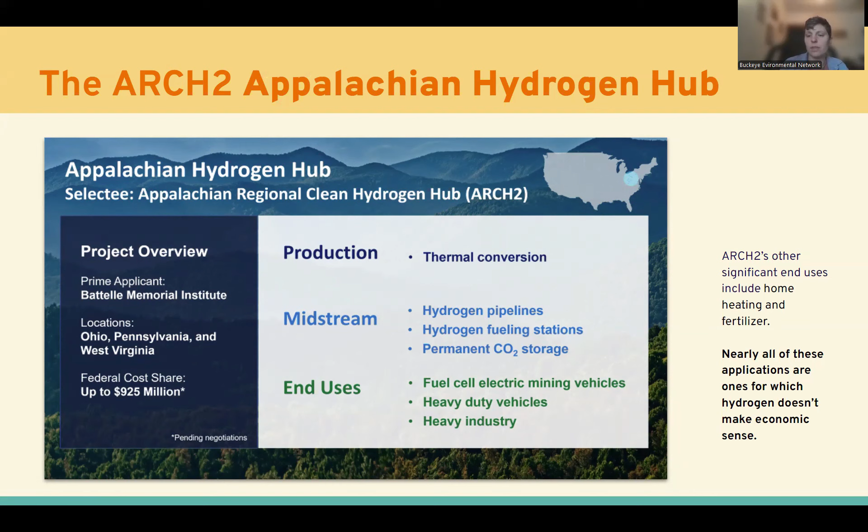There are 6 other hubs around the country. The Appalachian hub is just one of 7. And the federal government Department of Energy wants to dole out about $1 billion for each hub. Other significant end uses include home heating and fertilizer, and nearly all of these applications are ones for which hydrogen doesn't make economic sense.

Here's another map. The Enbridge Gas Ohio, formerly Dominion Energy Ohio, is here in the North Canton area for electrolytic hydrogen production, storage, and pipelines for use in regional transit, confirmed for the SARTA, Stark Area Regional Transit Authority. They would be working with that facility there.

The Independence Hydrogen Facility is proposed for Ashtabula, Ohio, and that would be hydrogen production from industrial off-gas from an existing chemical facility for heavy-duty equipment. Plug Power is confirmed for Etna and North Randall, and they would be storing the hydrogen, refueling stations, fuel cells, and backup power.

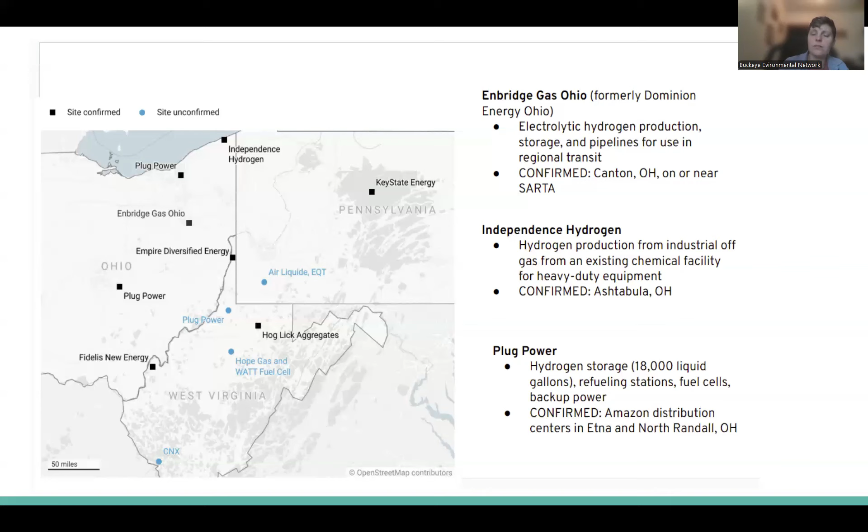These maps are constantly changing. There could be more facilities hop online at various places throughout the tri-state area. And these facilities are not the only places this would affect, because you have the fracking that would be needed. So fossil fuel extraction to the methane reforming or autothermal reforming down to carbon capture and injection - that process is blue hydrogen. Gray hydrogen is that process without carbon capture and injection, and it currently makes up 95% of US production.

Gray and blue hydrogen, both made from climate warming methane, have no place in our region. Green hydrogen is the only truly clean hydrogen there is, and it's not yet market ready. It's truly clean because it uses renewable energy, and that should only be used for heavy duty, long distance transportation and things like cement, steel, and other industrial applications. Only niche uses - not for passenger vehicles, utility scale power generation, and heating homes and buildings.

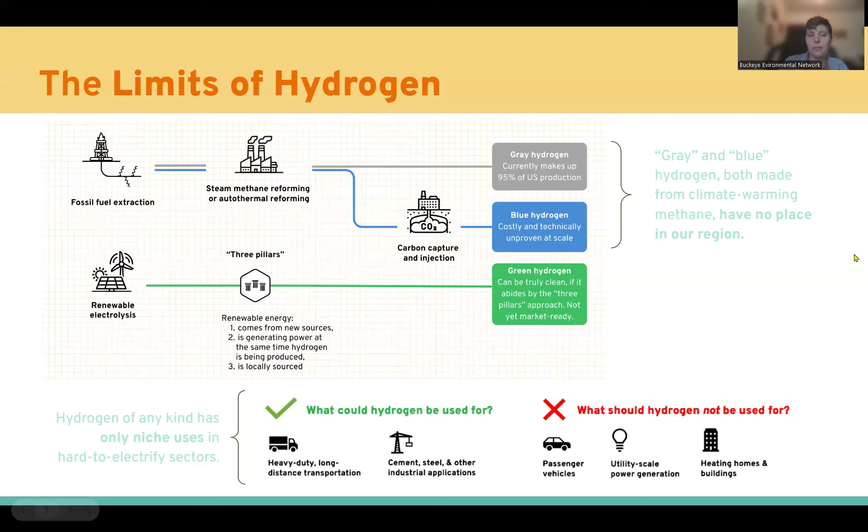Here's another slide on blue hydrogen. Again, it would use fracking. The gas pipelines can leak and release methane into the environment, and then you have the CO2 sequestered underground. Just a little graphic to understand a little bit more about that.

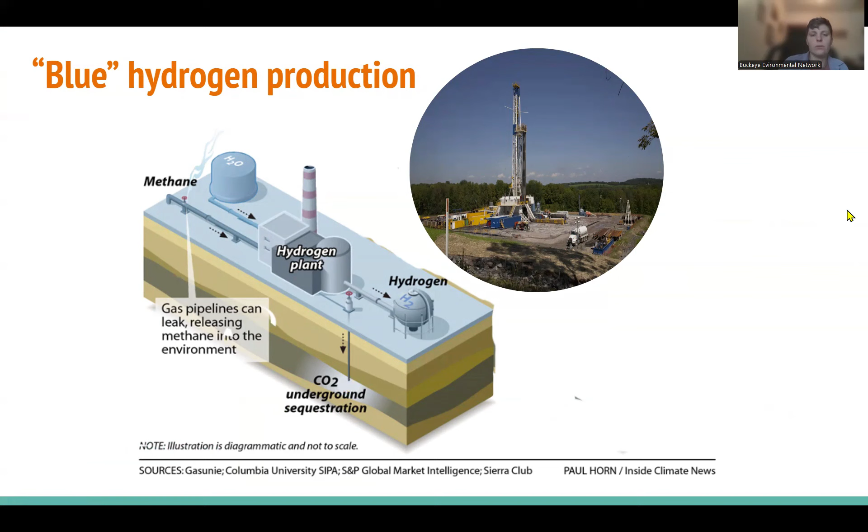The industry is attempting to create a demand for something we don't even need. They're looking for ways to stay afloat so they can keep extracting gas and oil. Clean energy is cheaper, more efficient, and more reliable than hydrogen and carbon capture and sequestration. Here's a little video if you want to check that out, AppalachiaHydrogenFacts.org.

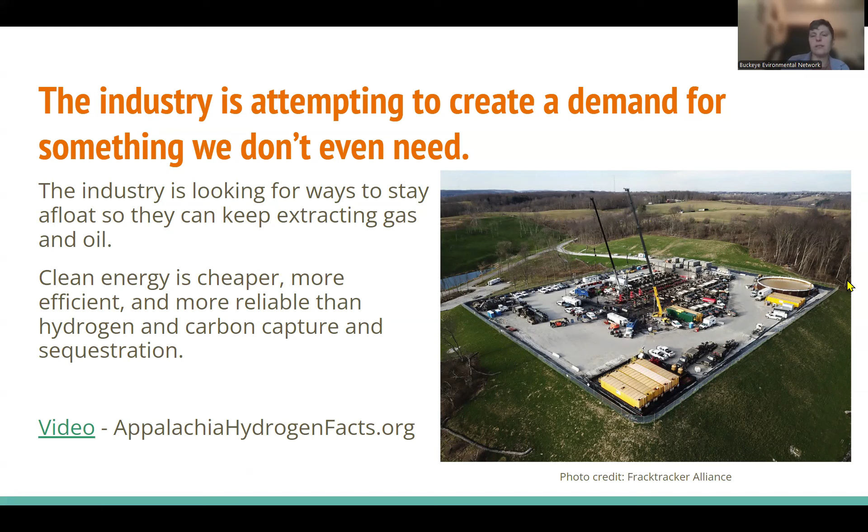Here's a photo from Fracktracker Alliance of a frack pad. More fracking would be required. Health impacts from oil and gas extraction are plentiful. That would mean more radioactive fracking waste and related infrastructure.

I wanted to plug this book here, Petroleum 238. Justin Nobel wrote it. He's an environmental journalist and a great writer, and he writes about this radioactive fracking waste issue nationwide. Here's a photo of Austin Master Services in Martins Ferry, Ohio, where the company piled in tons and tons of waste, well over permitted levels, and they left. There was an Ohio Attorney General lawsuit last year, and that lawsuit's ongoing, but ultimately the state of Ohio is going to have to pay for this mess.

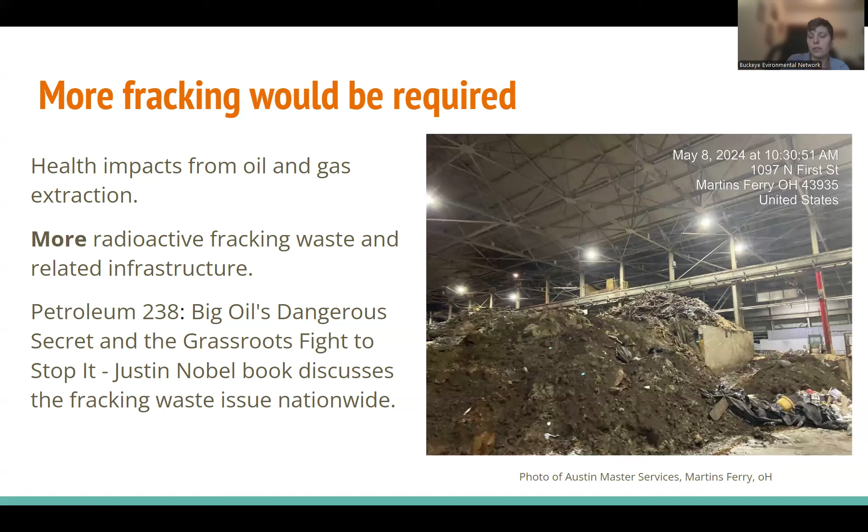$6 million is what it's going to cost to clean this up. The point is we don't need more of this waste stream. It's a real issue for the industry, and we don't need more of it. We need to focus on other alternative energies instead of perpetuating this.

The whole project depends on taxpayer dollars and government incentives. $925 million from the Inflation Reduction Act is what the government put towards this. There's two different tax credits here, for carbon capture and hydrogen, which we'll talk about later. But taxpayer dollars shouldn't be going towards these types of projects. We should be going towards truly transitioning projects, not these.

They use misleading terminologies, and there's a lack of transparency. The hub is not clean. It would use fracked gas, which is far from clean. They're pushing plans through without any transparency on site activities, locations, and plans. They're holding events without true experts, and technical questions have gone unanswered. Groups wanting info have to sign a non-disclosure agreement as well.

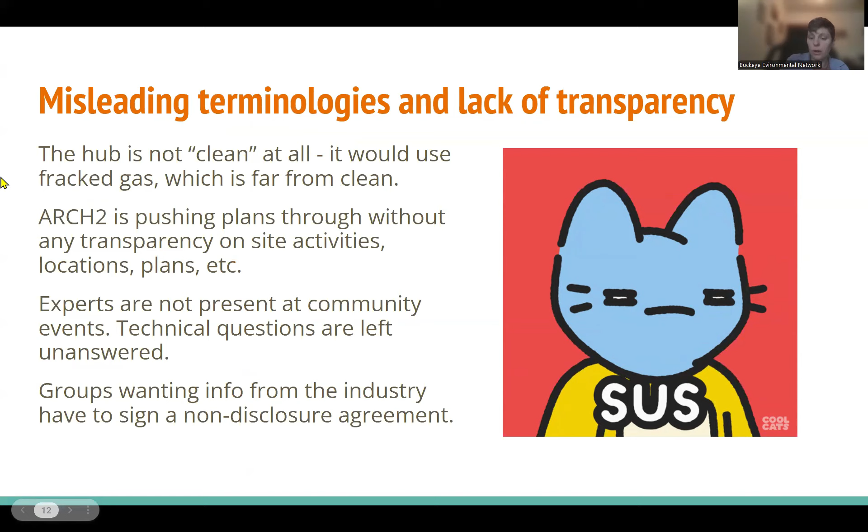Using hydrogen to power homes and fuel appliances is inefficient and wasteful. It actually takes more energy to create and use hydrogen than it does to just use natural gas alone. We should be using the energy we have to transition off of fossil fuels. Truly green hydrogen should only be used in niche industries.

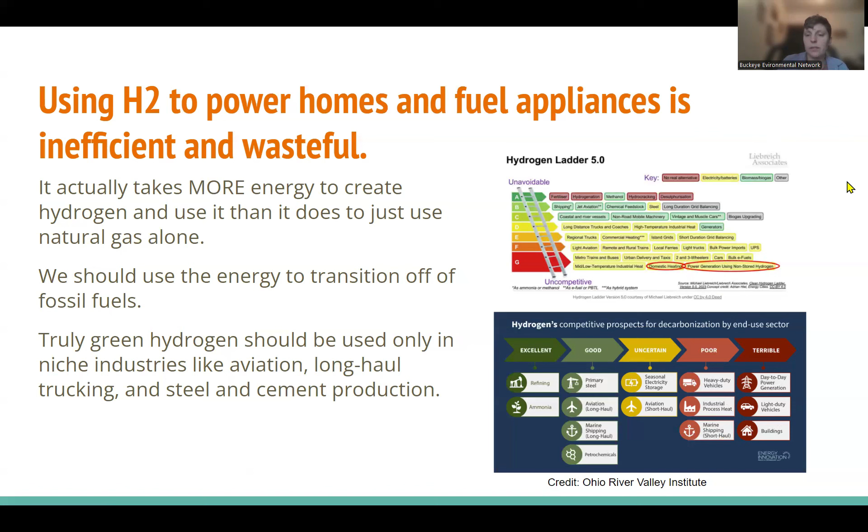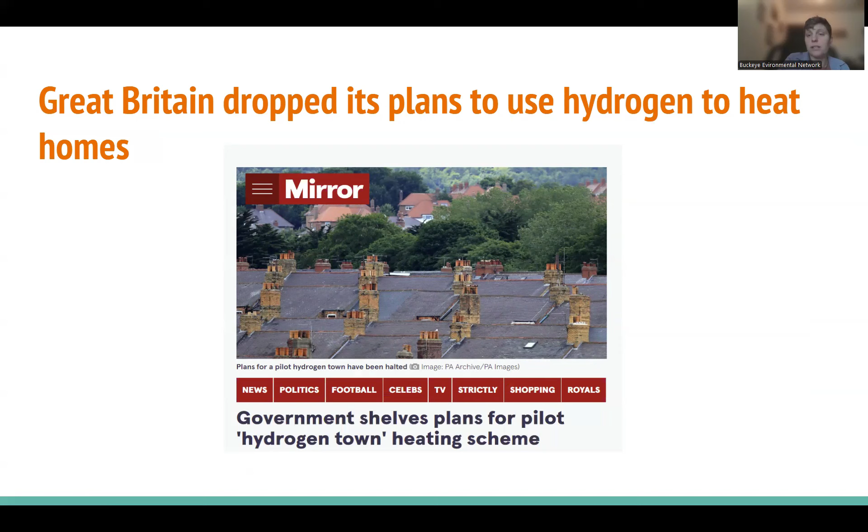Great Britain dropped its plans to use hydrogen to heat homes. This is from an article where the government basically shelved its pilot project. They realized it was just not a good idea.

Fuel cell buses are also a bad idea. They're a false climate solution for which there are already better and less expensive clean energy alternatives, including battery electric and hybrid buses. The capital costs are more than twice that of battery electric buses. Hydrogen fuel cell cost per mile is double that of diesel, and they require expensive new infrastructure to deliver and use hydrogen. Battery electric buses are more efficient, and fuel cell buses will increase the demand for natural gas and fracking.

Here's a picture of a hydrogen bus that exploded in Korea. This happened recently.

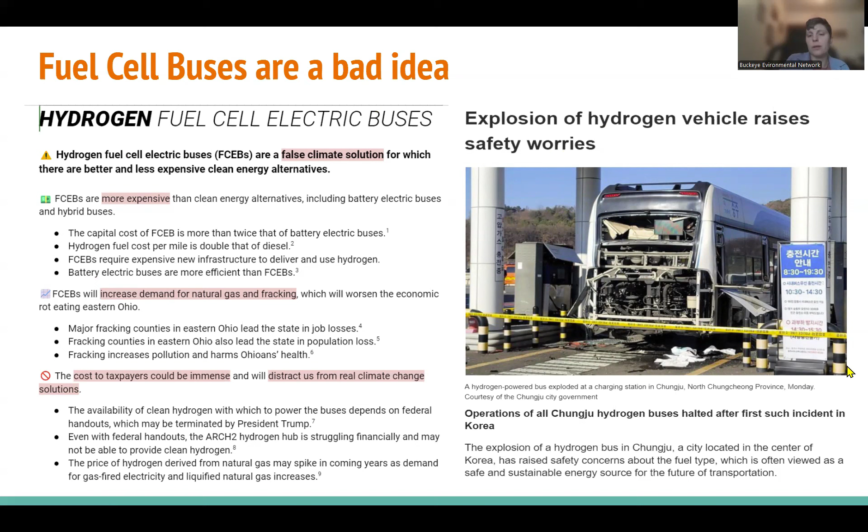Here's a slide on the dangers of carbon capture and storage. It's a greenwashing tool that poses a host of problems. It's unproven at commercial scale. It's really expensive. It enables fossil fuels, may increase emissions, and endangers those who live nearby.

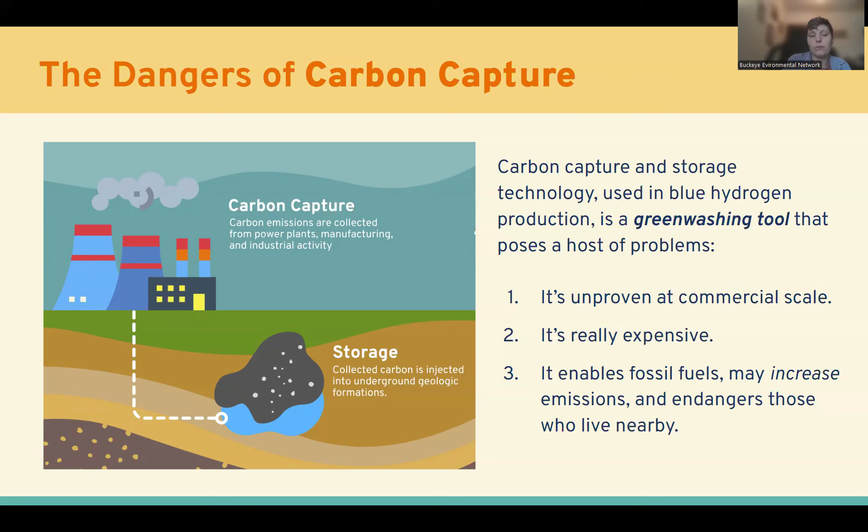Hydrogen and carbon capture and sequestration are not done at mass scale yet. There are only 839 projects globally, and only 51 are operational. Most of the rest are just planned, and they rarely, if ever, capture 90% of the carbon emissions. It's experimental, unproven, and dangerous.

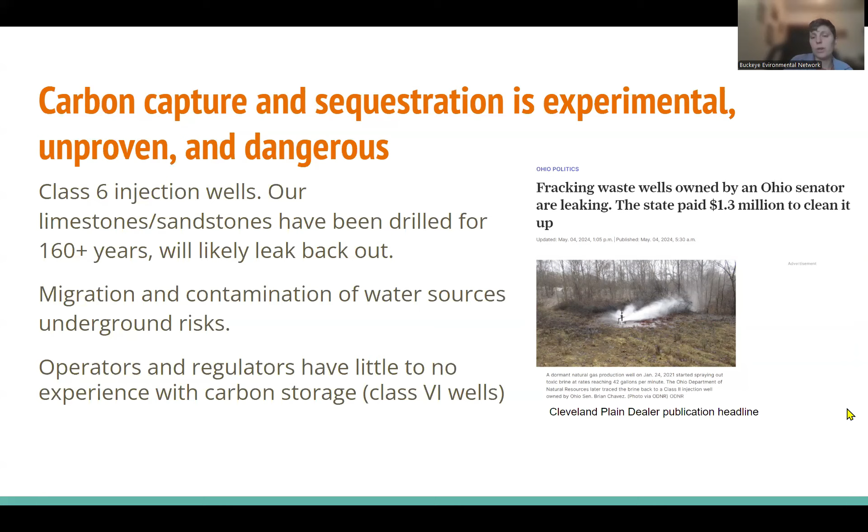Class 6 injection wells is what they are called. Our limestones and sandstones have already been drilled for over 160 years. Migration and contamination are concerns for underground water sources, and our operators and regulators have little to no experience with carbon storage Class 6 wells. Here's an image of an injection well that was leaking in Ohio, and the state had to pay $1.3 million to clean it up.

It's not good for the climate and atmosphere. Methane leaks from oil and gas extraction, and it's 86 times as potent a greenhouse gas than carbon dioxide over a 20-year period. The industry isn't considering the methane impacts in their hydrogen production, and hydrogen itself is also a greenhouse gas contributor. Here's a stack at a compressor station where they just flare off there, from Fracktracker as well.

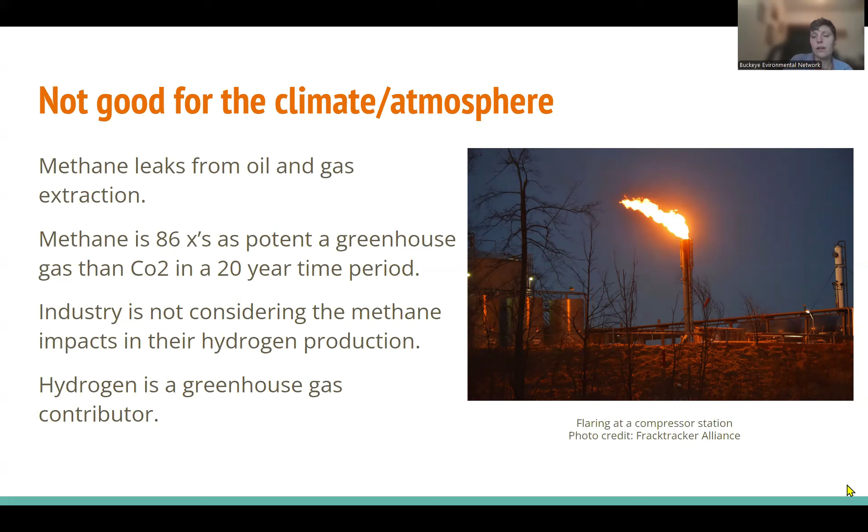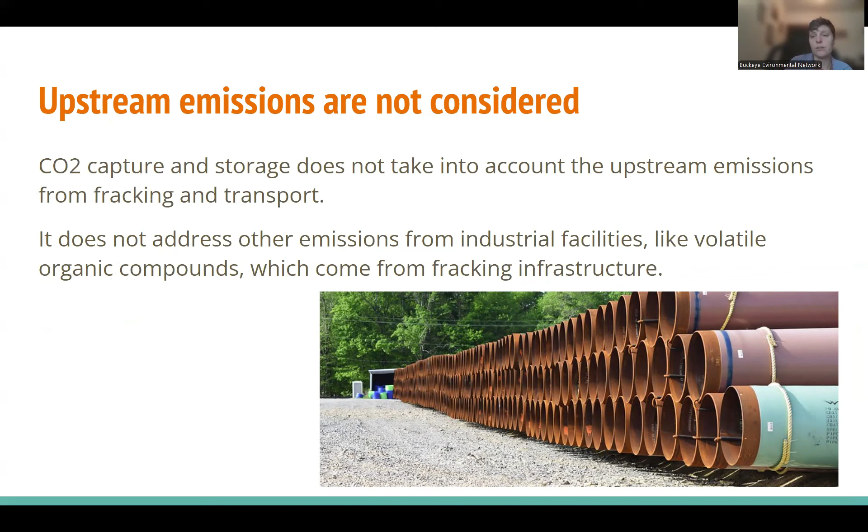Upstream emissions are also not considered. Carbon capture and storage does not take into account the upstream emissions from fracking and transport, and it does not address other emissions from industrial facilities like volatile organic compounds, which come from fracking infrastructure. It distracts us from real climate solutions. Our energy, time, attention, and resources should be spent on transitioning us away from carbon emitting sources. This would prolong the lifespan of fracking at a time we need to transition off of it.

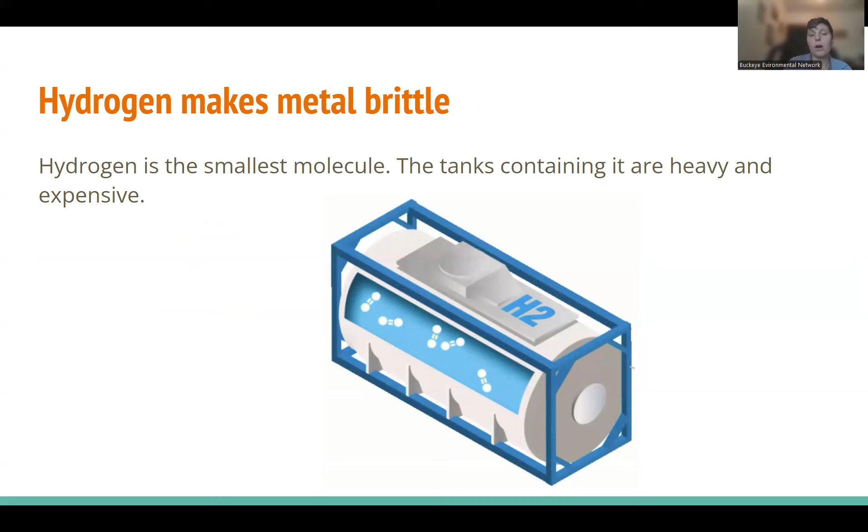Citizens would pay with their pocketbooks. ARCH2 would lead to higher utility bills, higher prices at the store, or citizens would pay through taxes. It could cost $230 billion to construct hydrogen projects, and the CO2 capture projects could cost up to $100 billion yearly and $1 trillion over 10 years, and that would be added to Americans' electric bills, an increase of 25%. Again, we are saying here that these projects are very expensive, and we have cheaper alternatives already in place that we should be utilizing and expanding.

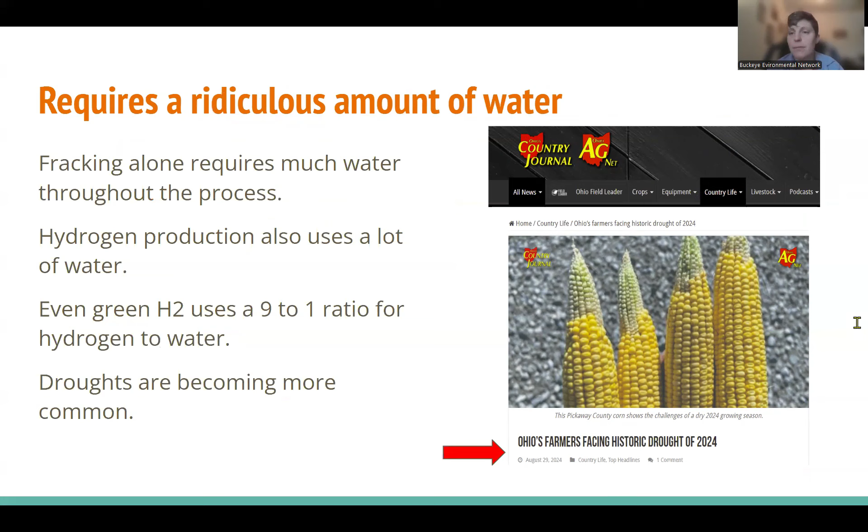It requires a ridiculous amount of water. Fracking alone requires a lot of water throughout the process, and so does hydrogen production. Even green hydrogen uses a 9-to-1 ratio for hydrogen to water. And droughts are becoming more common. Ohio farmers faced a historic drought in 2024. We can expect more of that to happen in the future. So we need to conserve our water.

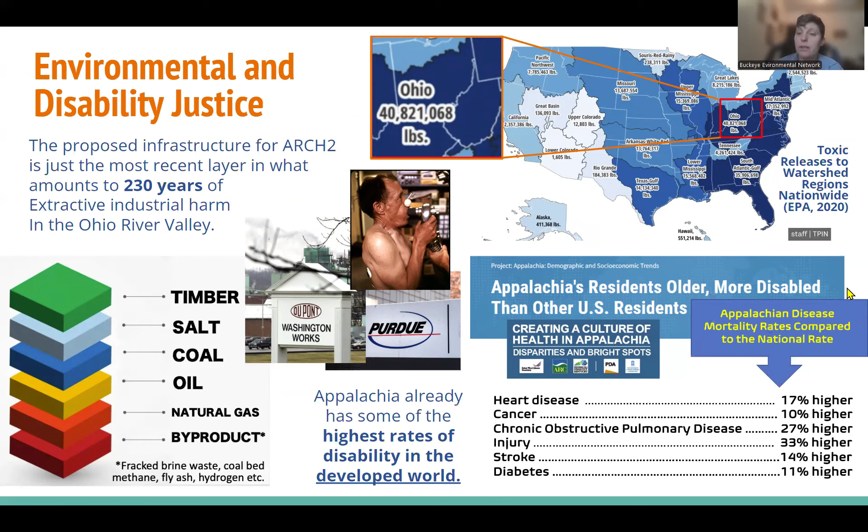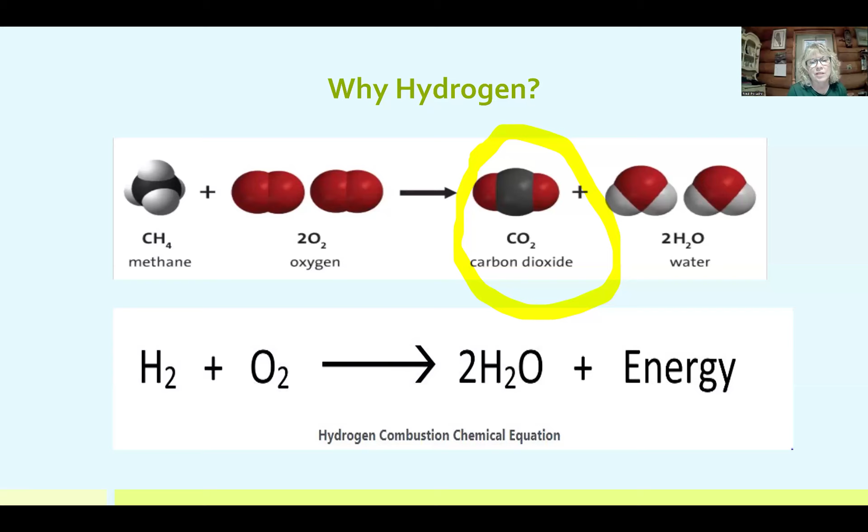Okay, so just a little background on hydrogen. I noticed something on the Hydrogen Hub on the ARCH2 website a while back, and they said hydrogen isn't toxic. Well, technically it isn't toxic, but it's flammable and explosive. It's the number one most abundant element in the universe. It's extremely small. If you look at the bottom where the little hydrogen atom is, and the bottom right-hand side, you see water has 2 hydrogens in it and methane has 4 hydrogens in it. This is basically where the hydrogen hub is going to get the hydrogen atoms from to make hydrogen gas—diatomic gas, either from splitting a water molecule or taking them off a methane molecule in the steam methane reforming.

The other thing about hydrogen is because it is so small, it can permeate a lot of different surfaces. It can go through plastic, and it can also go through steel and cause steel embrittlement. Years ago, when I worked at National Steel, I ran a scanning electron microscope. I can tell you that when we closed the microscope and evacuated the bell jar where we had our samples, hydrogen was able to go through the stainless steel bell jar that was torqued down with screws into a soft carbon gasket, but hydrogen could go through that. That's how small that molecule is. So I know from firsthand experience, it can permeate through fittings, like metal fittings.

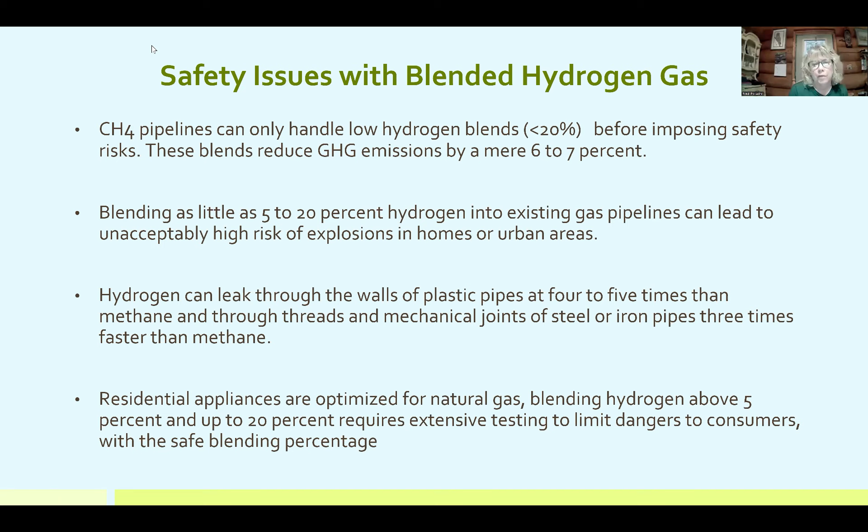A lot of people have just glossed over this issue as far as hydrogen being a greenhouse gas. It's not a direct greenhouse gas like some of the other gases are, but it's an indirect greenhouse gas. They've looked at it over a 100-year period where 1 kilogram of hydrogen leads to as much global warming as 4.3 kilograms of CO2.

And then the slide I'm going to show you in a minute points out how hydrogen, the chemical reactions that happen in the lower atmosphere with hydrogen and some of the other gases, these are what exacerbate the greenhouse gas issues with hydrogen. So it interacts with methane, ozone, and stratospheric water vapors, as well as aerosols. Okay, next slide.

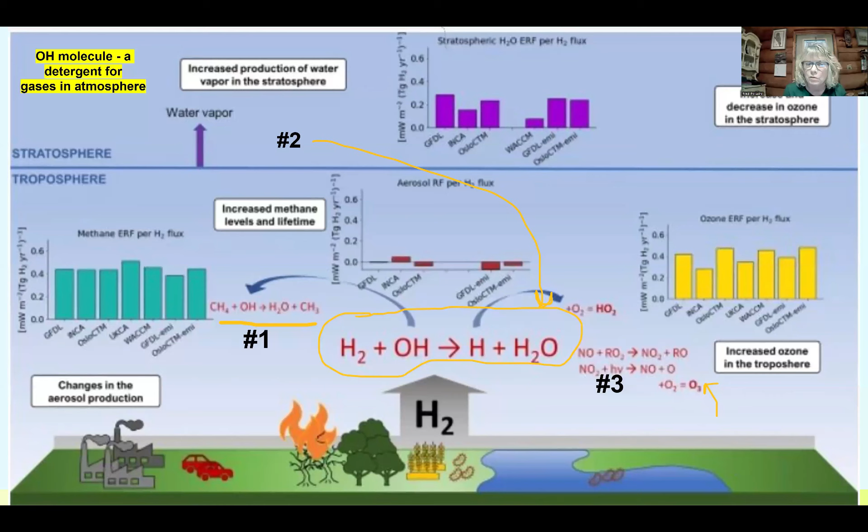Okay, some other things that it does, without getting into a real deep chemistry lesson here, is that it does increase, number 3, it does increase the amount of ozone. Now, ozone is great when it's up there in the stratosphere. It's not so great when it's down here at ground level because it causes things like smog. So that's another reaction. Those 3 are the important reactions, which show you how hydrogen can act as an indirect greenhouse gas. Okay, next slide.

Okay, I had on the very first slide or the second slide, the little dancing hydrogen molecule and how they were connected. The hydrogen atoms are connected to water, and they're also connected to methane. So one of the dangerous things about this hub is it's going to promote fracking, because they're going to rely on steam methane reforming to generate the hydrogen gas using the methane gas from fracking.

Another way is biogas. They're going to use anaerobic digestion. So what happens in your septic tank without oxygen, you can create methane gas in there. And then they're going to take the hydrogens off that methane to use. And then electrolysis, they'll split a water molecule using electrolyzers, and they will break that water molecule into hydrogen and oxygen. Okay, next slide.

And in some cases, you even get nitrogen oxide gases. So it's not a simple process, because so much of that steam methane reforming around the world is used to make hydrogen gas, and generates enormous amounts of carbon dioxide. And that's where the carbon capture process of blue hydrogen comes into play. Okay, next slide.

Okay, so this is what the industry, when they talk about carbon capture and sequestration, this was a cute little cartoon. It's exactly what they think it does: it sucks all the CO2 off of the facility and then buries it underground, like it's just as simple as that. And it's not nearly that simple. Next slide.

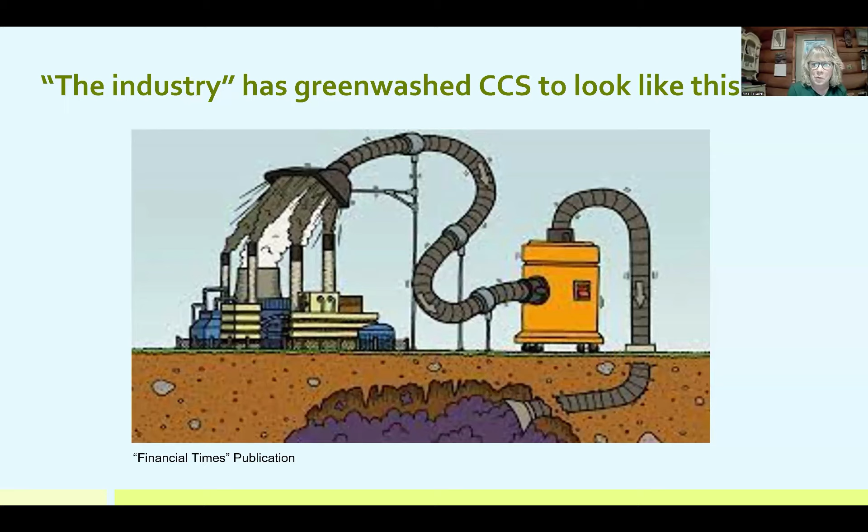So this shows you some of the things that are issues with carbon capture and sequestration. One of them is the fact that when they have this CO2, it's a supercritical fluid, so it's an extremely high pressure - like over 1,000 PSI, just to give you an example. Right now we're at 14 or 15 psi. Your bike tires, when you inflate them, are around 50 psi.

So imagine the pressure of over 1,000 psi, shooting that down into an area where we've already got old conventional oil wells, long wall mining, strip mining, injection wells for brine from fracking. So you're shooting this very high pressure fluid down inside of these cavities in the ground, and crossing your fingers that it'll stay there. Another issue is the fact that if it does start to move through the bedrock, it will cause groundwater to be acidified.

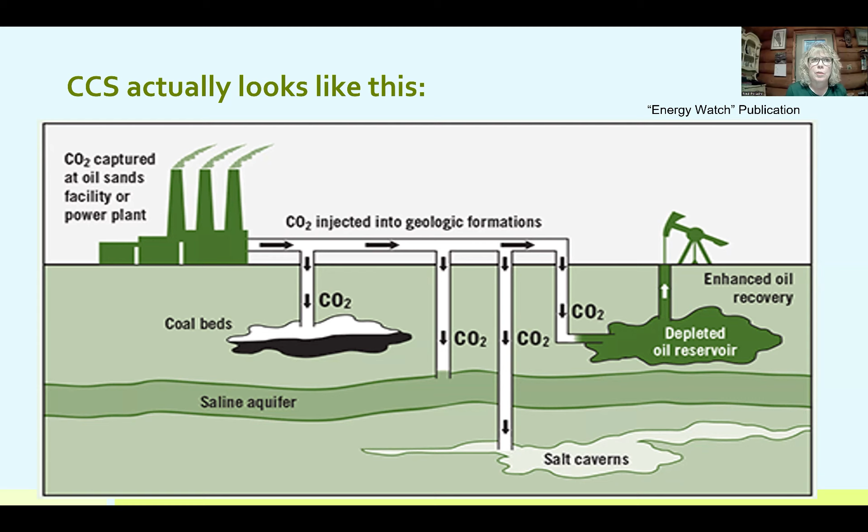So you're making carbonic acid, and people that rely on groundwater, that's going to be an issue for them. And it also will, once the water's acidified, dissolve some toxic metals that are down there as well. And most of the CO2 now is used for enhanced oil recovery. So will we be using that for oil and gas recovery here, or will we actually be using it to just send down into the ground? Okay, next slide.

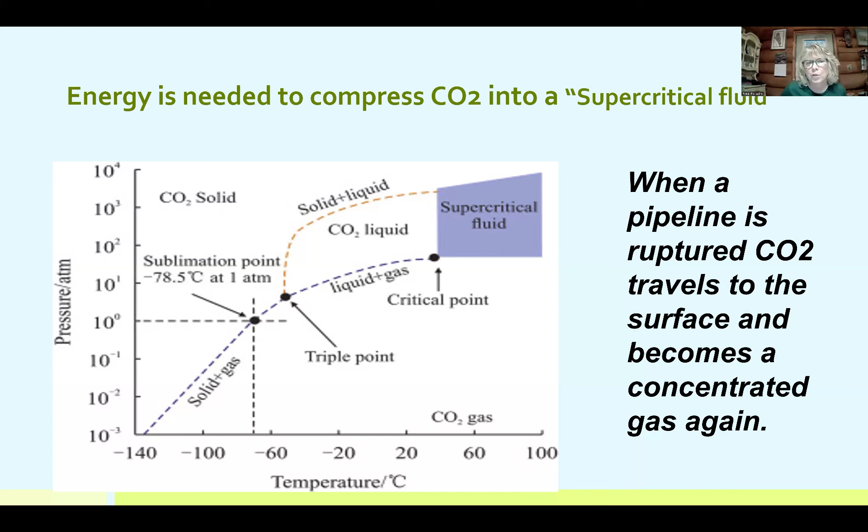And it's not that CO2 is toxic, but once there's CO2, there's no oxygen, and it will asphyxiate people. It will turn off combustion engines. You can't get emergency vehicles around. That city in Mississippi had this happen a couple of years ago. Okay, next slide.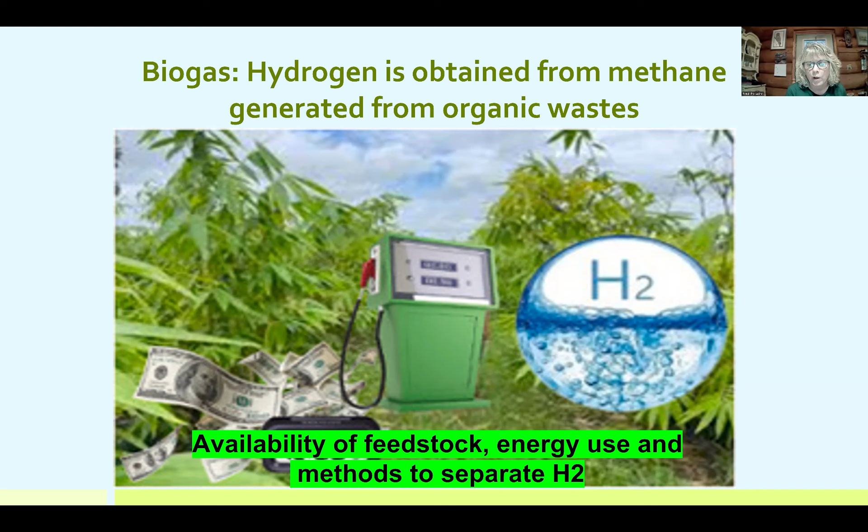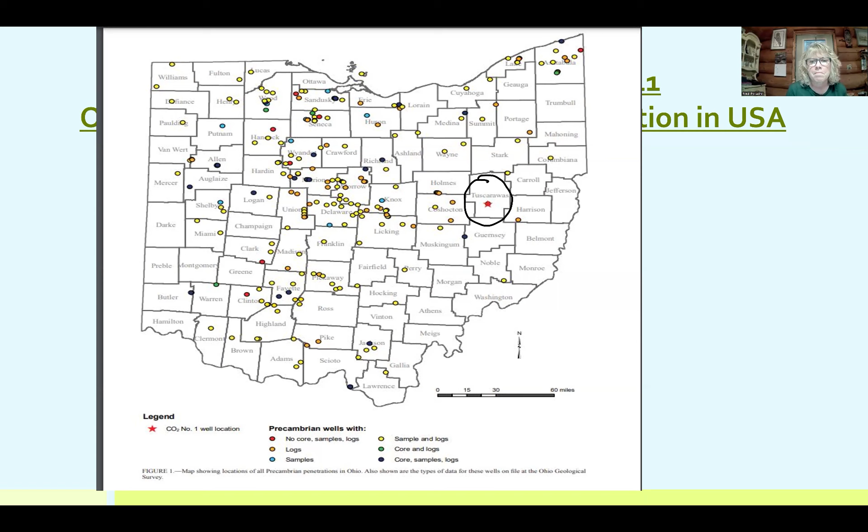Okay, to be truly green hydrogen, there's a lot of data and different benchmarks you have to meet to get certain classifications. Truly green hydrogen would come from using electrolysis to separate a water molecule, but the electricity for that process would have to come from wind turbines or solar energy. It would have to be renewable energy, and it's going to be very expensive. Green hydrogen is very expensive.

Right now, Ohio has about 4% of its electricity from renewables. So them saying that the plug power plants are going to be green hydrogen is not really true, because in order for it to be green, it has to be from renewable energy. I'm betting they're going to pull that off the grid, and it's going to be fossil fuel energy.

Another issue with green hydrogen, regardless of whether it's renewable energy, is they use electrolyzers, and the fuel cells need PFAS, the forever chemical, in the ionomers. It's like a barrier separating the oxygen from the hydrogen in the fuel cell, and it's very toxic. If you go online and type in PFAS regulations and green energy or hydrogen, you'll see that Europe and a lot of other countries are pushing back against PFAS regulations, because they're telling the governments, we can't do this, we need PFAS, we can't make these fuel cells without it, so we need to be excluded from these regulations.

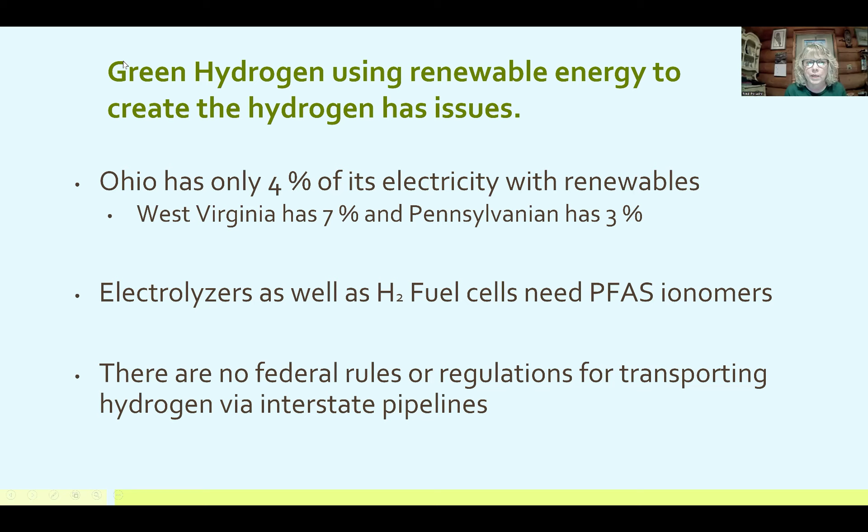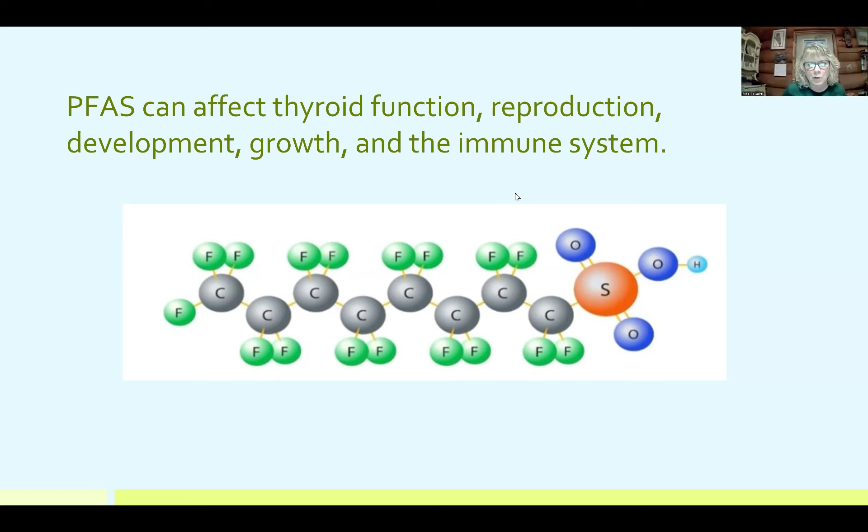Each of those projects is to some degree its own creature. So one of the challenges we've had as an organization, as a movement, is to help bring people from the states of Ohio, Pennsylvania, and West Virginia together in their understanding of this project, which actually spans all three states. We began looking at this in detail back in 2022, and then in September of 2023, the Ohio River Valley Institute organized a workshop for journalists to talk about some of the consequences of the hydrogen hub as it was being contemplated at that time.

And I'd point out that that's before the federal government had selected any hydrogen hubs for funding at that point. Bev, can we go to the second slide? At the time we did the workshop, we pointed out that there was an inherent problem with an Appalachian hydrogen hub.

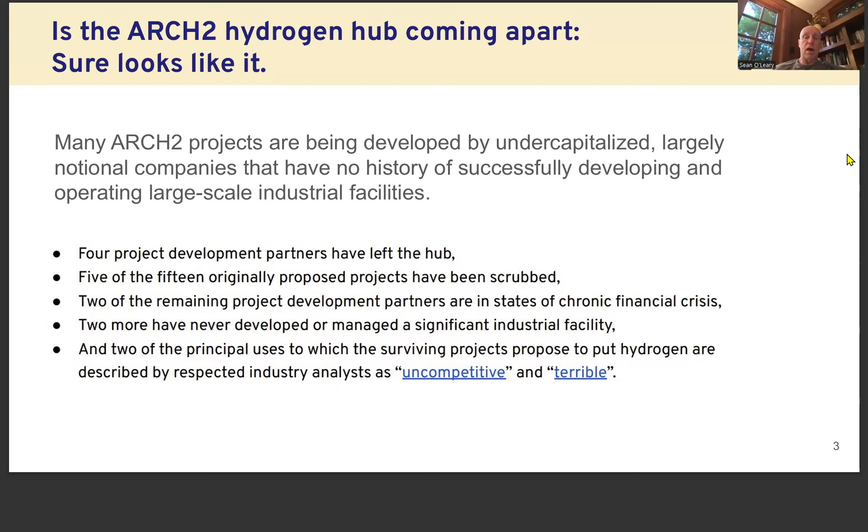This is a significant problem for the ARCH2 hydrogen hub because its ability to command subsidies from the federal government and investment from investors turns in large part on its ability to demonstrate its viability as a business. The federal government has earmarked $925 million to help develop the ARCH2 hub, but that represents only about 10 to 15% of the actual capital that will be required to build all of these projected facilities. Right now the hydrogen hub is having trouble finding investors willing to fork over money to add to what the federal government is kicking in.

Could we go to the next slide? And we're seeing the effects of that. As I said, a third of the projects that were part of the original ARCH2 hub have already evaporated. And just this past week, the federal government announced its rule regarding the availability of tax credits for clean hydrogen.

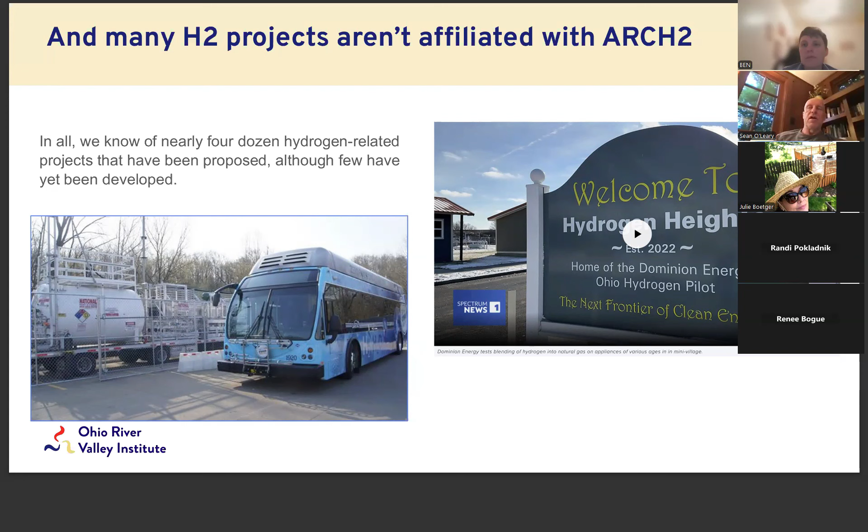Right now we're looking at a couple of those in our region. One of them is SARTA, the Stark Area Regional Transit Authority, which is trying to purchase and operate a number of hydrogen-powered buses. And also, Bev, the project for heating and powering homes—that's in Hudson, Ohio, correct? Yes. In Hudson, Ohio, we're talking about a community that would see its homes powered by hydrogen, which, if you go back to what Dr. Randi told us a moment ago, raises some real concerns about health, safety, and also the economics of it. So it's important that we realize that while the ARCH2 project gives us a focal point for advocacy, we also need to be conscious of other hydrogen-related projects being proposed around the area.

Again, as we see various projects collapse and go by the wayside, and we see ARCH2's efforts to try to backfill, they're doing so in part because their failure to bring these projects to fruition threatens their ability to get federal money. This is another area in which that gives us opportunity as advocates to have an impact and to help discourage development of many of these projects that truly are counterproductive and dangerous.

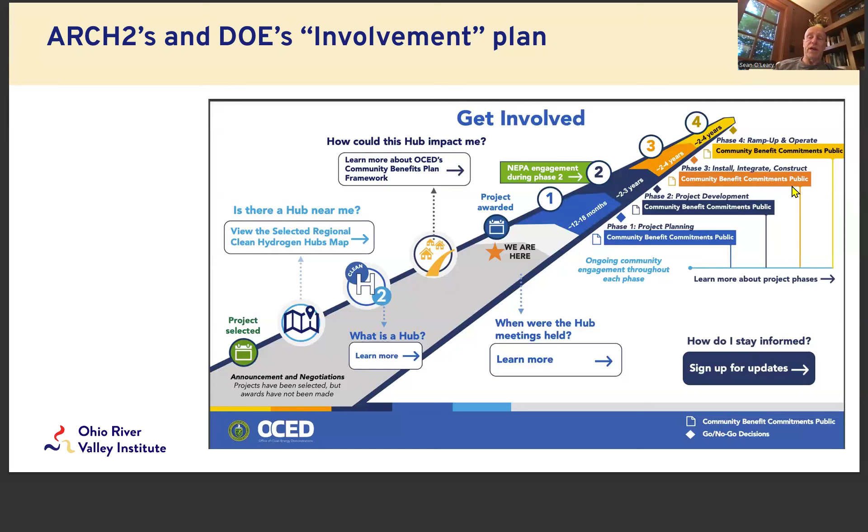Next slide. The open house taking place in a couple of days in North Canton is an example of a very early stage effort by the ARCH2 Hub to reach out to communities that are going to be affected. They've already had a session like this one in southern West Virginia, and although it's been temporarily postponed because of weather issues, they're going to have another session like this in Washington County, Pennsylvania, relatively shortly as well.

These are open houses in which, at least based on the West Virginia open house, ARCH2 has had a few of its development partners bring displays to a meeting hall, and in kind of science fair fashion, they allow folks from the community to go around and talk. Unfortunately, what has not been provided to date have been opportunities for a real public hearing where we see and hear representatives from ARCH2 and the federal government, and where citizens like us have the opportunity to question them about the details of this.

Now, I don't know exactly how the open house in North Canton is going to be conducted, but if it's like the one in southern West Virginia, it may be somewhat frustrating from an advocacy standpoint, because the science fair format, where you can basically circulate from table to table to meet a developer or somebody who has some kind of display, doesn't really lend itself to effective questions and answers in which the entire community can engage. But I hope that all of you who can be there will try to attend this and make a point of expressing your concerns to the folks who are there from the ARCH2 developers. Next slide.